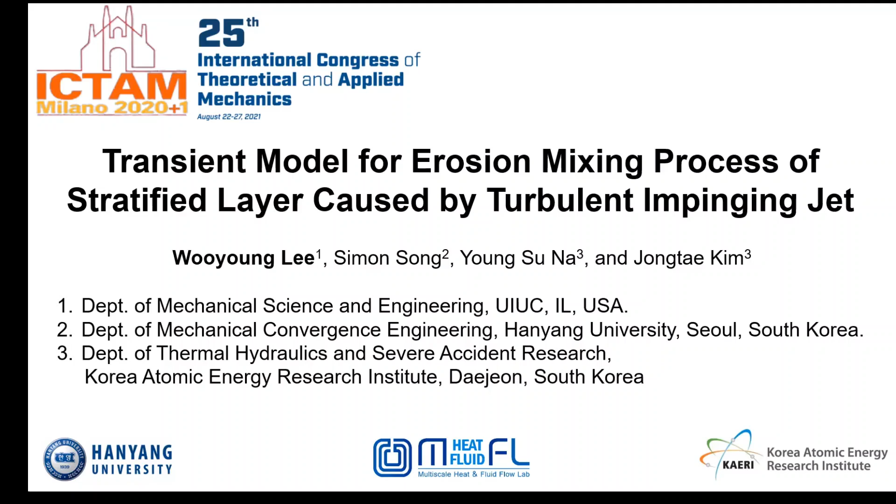The topic of this talk is the transient model for erosion mixing process of a stratified layer caused by a turbulent impinging jet.

The erosion mixing phenomena of the stratified layer caused by a turbulent impinging jet is of interest when evaluating the hydrogen risk of nuclear power plants in severe accidents, because it determines the behaviors of stratified hydrogen layer in a containment building and affects the safety of the building.

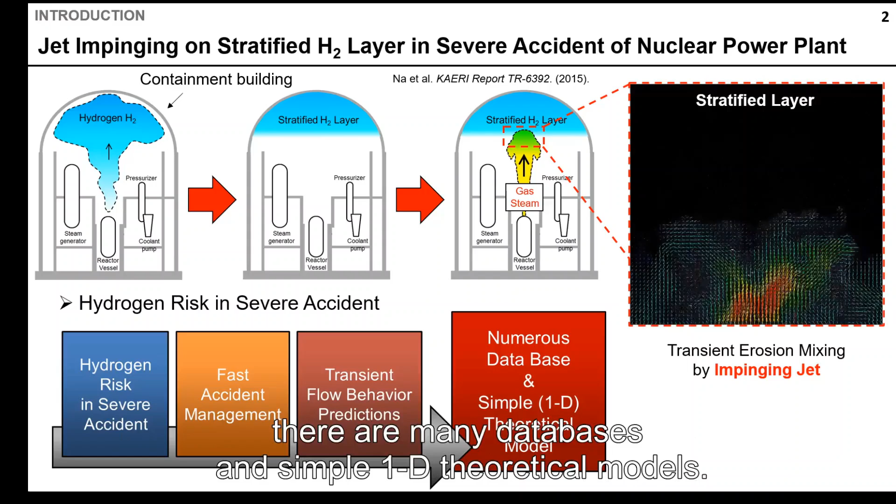To manage the severe accident quickly, it is important to predict the hydrogen behaviors quickly and accurately. This can be achieved only if there are many databases and simple one-D theoretical models.

To obtain databases, experts in Germany, France, Switzerland, Japan, and Korea have constructed large-scale experimental facilities, and they have performed erosion mixing experiments.

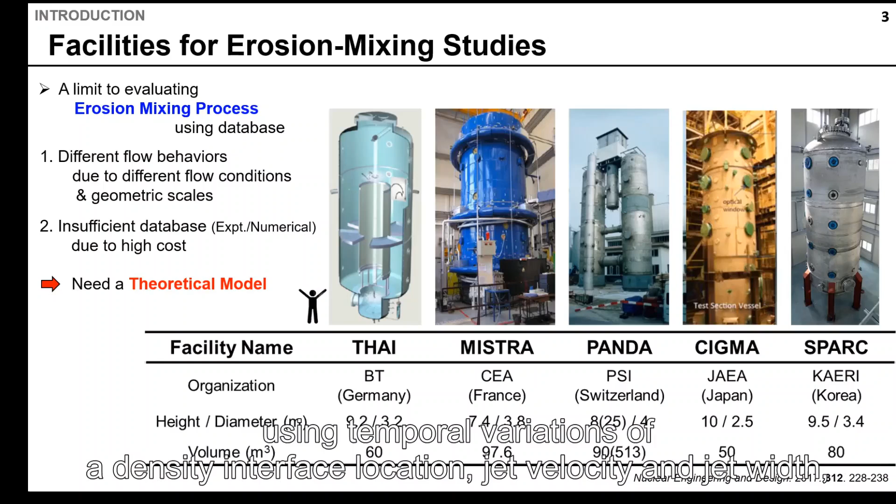With the obtained databases, they have investigated the transient erosion mixing process over a long period of time using temporal variation of density interface location, jet velocity, and jet width, which represent the transient behaviors of the stratified hydrogen layer and impinging jet flow. However, different flow behaviors due to different conditions and insufficient databases due to high cost make it difficult to characterize the process.

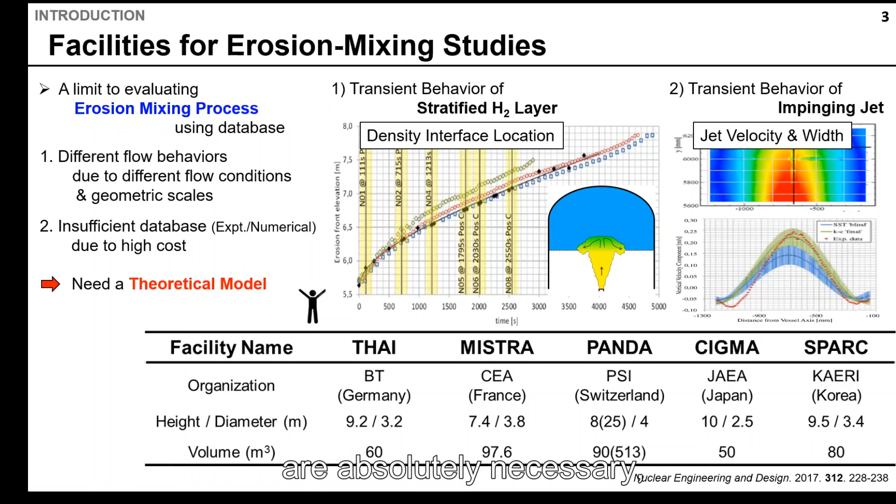To predict and evaluate the process quickly and accurately under various physical conditions in severe accident, transient models with the impact of physical conditions are absolutely necessary, but they have not been developed.

Of course, there is a theoretical model developed for the turbulent jet impinging on a uniformly stratified layer. The previous model shows the time average scheme of the impinging jet flows at a quasi-steady state, like this.

However, the previous model cannot be used to predict the transient erosion mixing process because it's valid only for the quasi-steady state, as you can see.

And it considers only a turbulent jet impinging on a fixed density interface of a uniformly stratified layer, where the density gradient and pressure gradient do not exist.

Unfortunately, real conditions are more complicated than this. The condition could include the elapsed time and presence of density gradients inside the stratified layer and pressure gradient inside the jet due to the impingement.

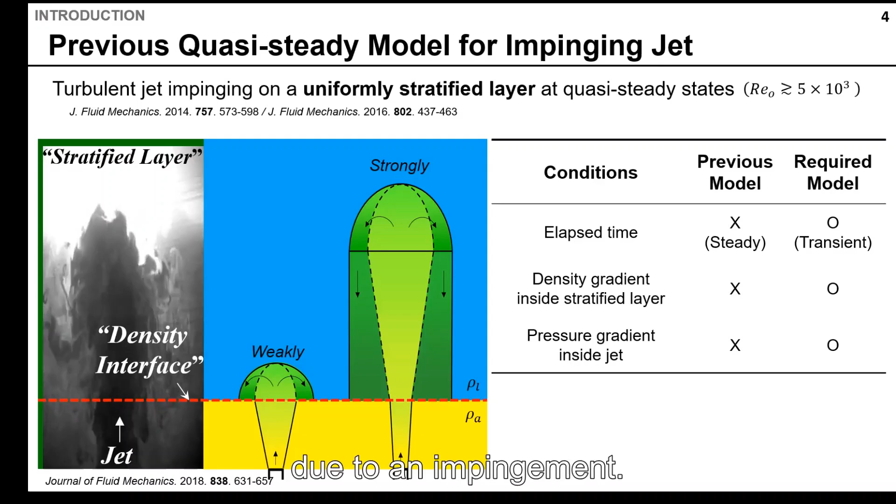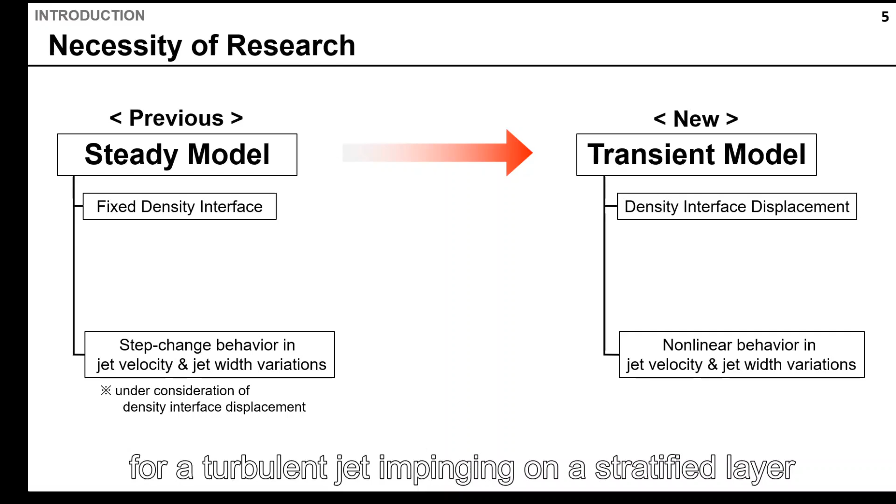To predict and evaluate the transient erosion mixing process over a long period of time, we need to develop the theoretical model of the turbulent jet impinging on a stratified layer by considering the elapsed time, the density gradient of the stratified layer, and the pressure gradient of the jet.

If we consider these conditions, the variation of density interface location, jet velocity, and jet width are expected to show nonlinear behaviors with time, unlike the previous steady model.

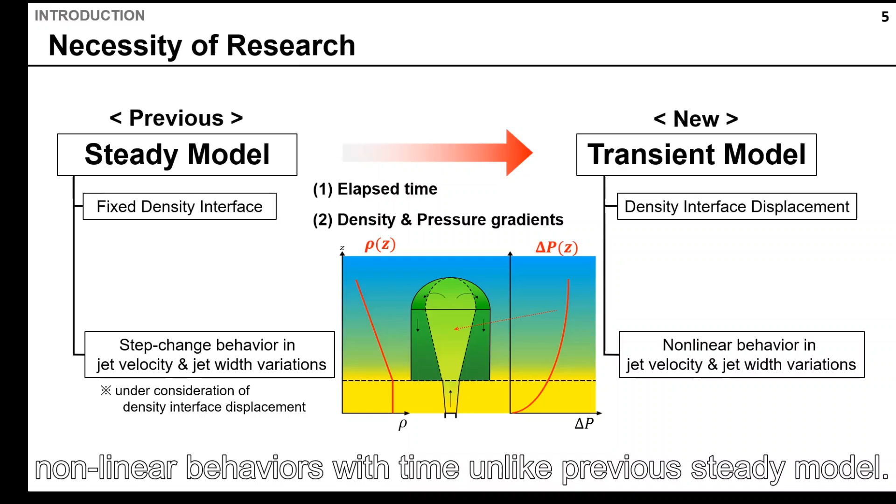So the main objective is to develop the transient model for characterizing the erosion mixing process for a stratified layer and turbulent impinging jet with both density and pressure gradients.

First, we performed erosion mixing experiments. Second, we developed the transient model by considering these conditions. Finally, we validated the model using the experiment data.

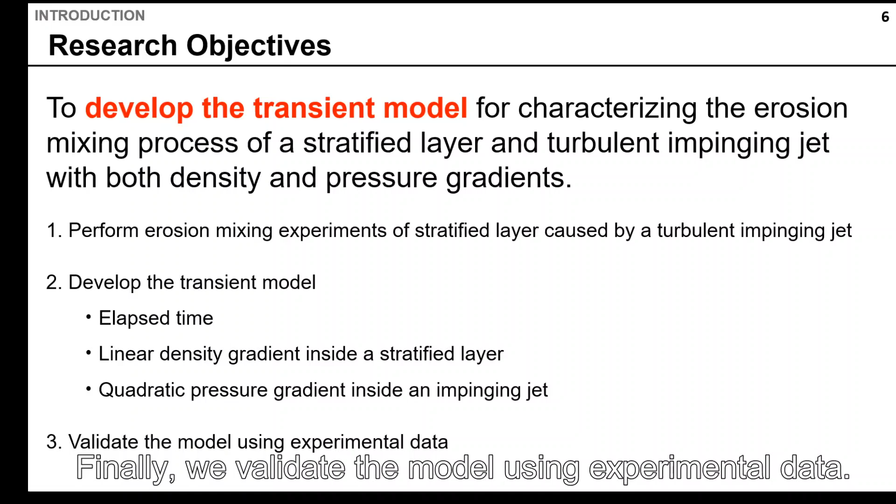From now on, I'm going to explain the experimental setup.

The Korea Atomic Energy Research Institute made a SPARC test facility for the erosion mixing experiment. The SPARC test facility is comprised of a cylindrical pressure vessel, gas sampling pipes, and a jet nozzle.

We first made the stratified layer using helium gas instead of hydrogen gas, and then we injected the turbulent jet using air at a constant flow rate through the jet nozzle.

To measure the velocity field, we used the large-scale PIV system. The width or height of the field of view were about 84 centimeters.

A gas mixture inside the vessel was sampled through the gas sampling pipes, and each density is calculated based on the helium concentration measured by a thermal conductivity sensor.

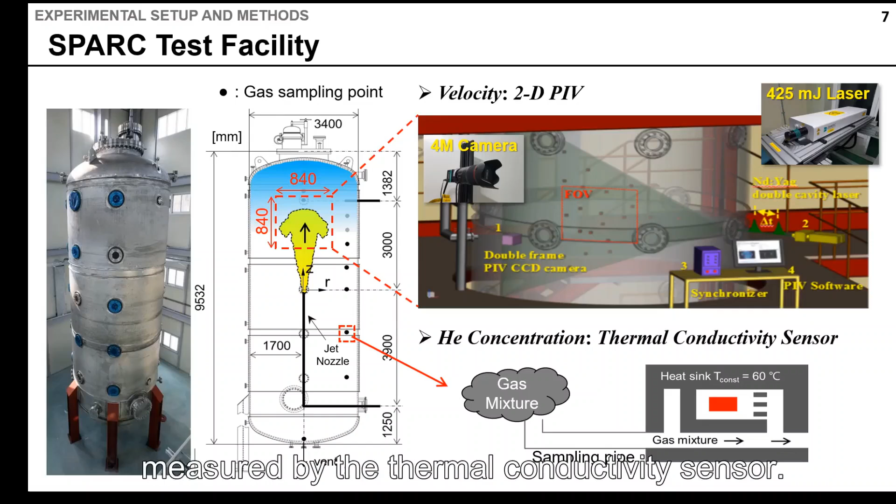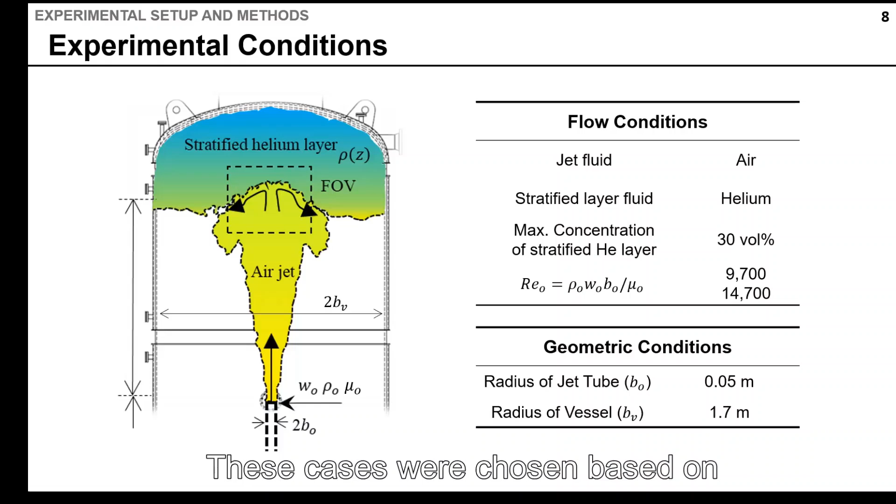We performed the experiments with different flow rates of air jet while keeping the helium concentration of the stratified layer at 30%. In this study, jet source Reynolds numbers of case 1 and case 2 were 10,000 and 15,000 respectively. These cases were chosen based on the scenario of the postulated severe accident.

From now on, I'm going to explain the experimental results.

This slide shows the temporal variation of vertical density distribution and time average axial velocity field inside the vessel for case 1. Each vertical axis is vertical position rescaled by the jet nozzle radius and jet entrainment coefficient. The horizontal axis are local density and the horizontal position rescaled by the jet fluid density and jet nozzle radius respectively. As shown in figure A, the interface location and the density gradient went up together as time increased in the course of the erosion mixing process.

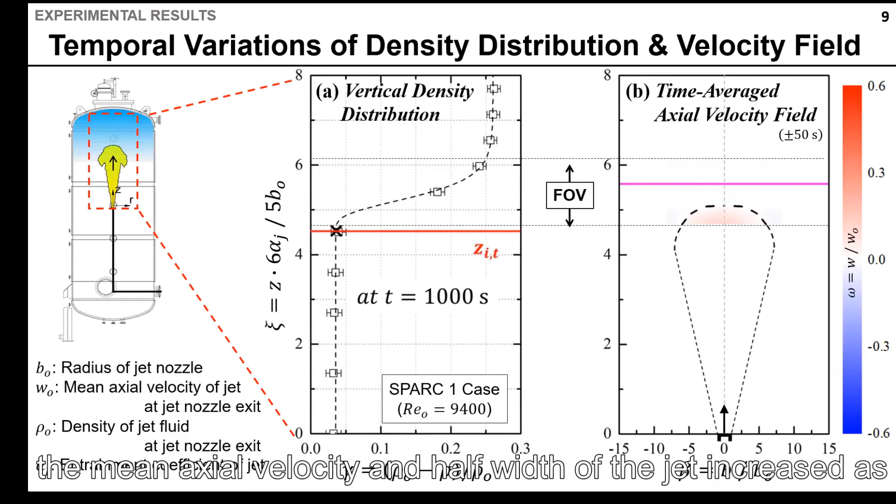From the result, we found that the density gradient has formed linear over a wide vertical range and varied with time. Similar to this, as shown in figure B, the mean axial velocity and half width of the jet increased as time increased at a fixed vertical position.

This slide shows the temporal variation of density interface location, jet mean axial velocity, and jet half width for case 1. Each horizontal axis is elapsed time rescaled by the jet entrainment coefficient, jet nozzle radius, and jet mean axial velocity at jet nozzle exit. The vertical axis rescaled the interface displacement, jet mean axial velocity, and jet half width.

As shown in figure A and B, all the variation showed nonlinear behavior with time, where it went up rapidly in the initial stage but slowed down afterward.

On the other hand, we could not predict these behaviors despite use of the corresponding previous model, which does not consider density and pressure gradients, but only considers elapsed time.

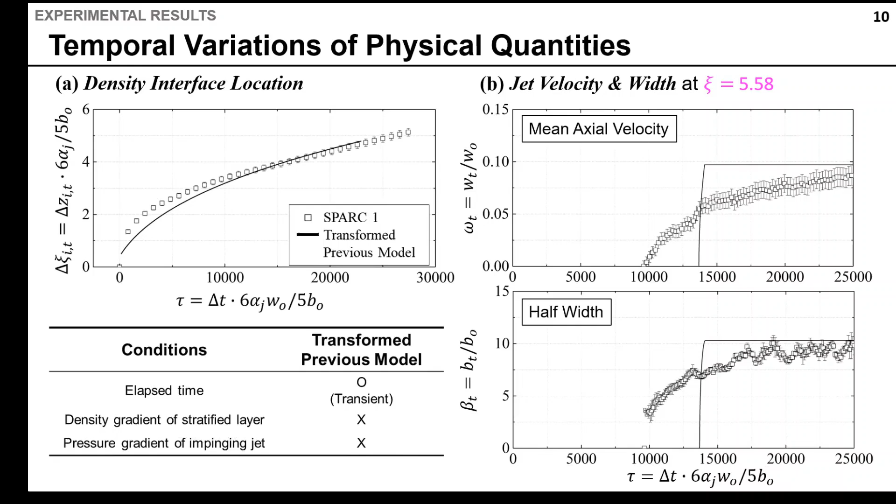From the result, we found that the nonlinear behaviors were induced by the presence of density gradient and pressure gradients, which means that the variation depends mainly on the gradients. Therefore, the gradients should be considered to predict the nonlinear behaviors in the variations.

From now on, I'm going to explain the development of a transient model for a turbulent jet impinging on a linearly stratified layer in the presence of pressure gradient.

As I mentioned before, the variations are affected by density and pressure gradients. To develop the model, it's necessary to include a negative buoyant force, negative pressure force, strength of density gradient, and strength of pressure gradient like this.

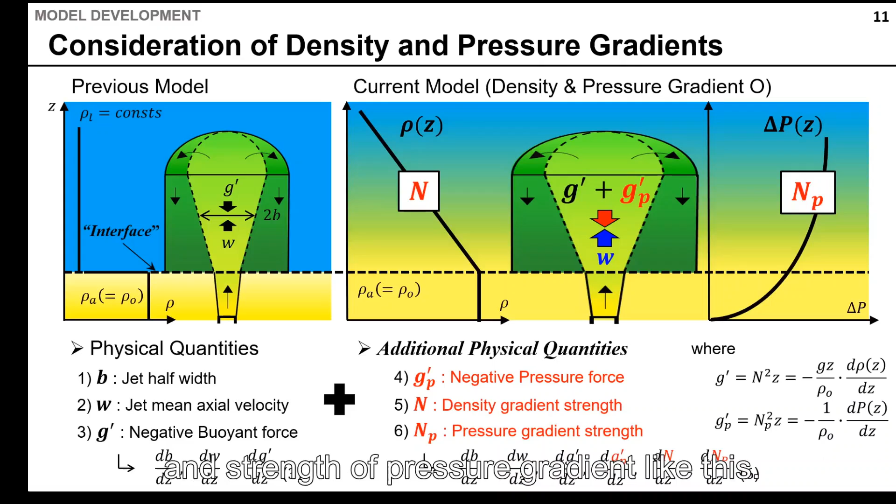These differential equations of quantities are derived from the flux conservations inside control volumes. There are 5 fluxes, from the volume flux to the energy flux. For the 5 distinct regions, the same derivation process has been performed.

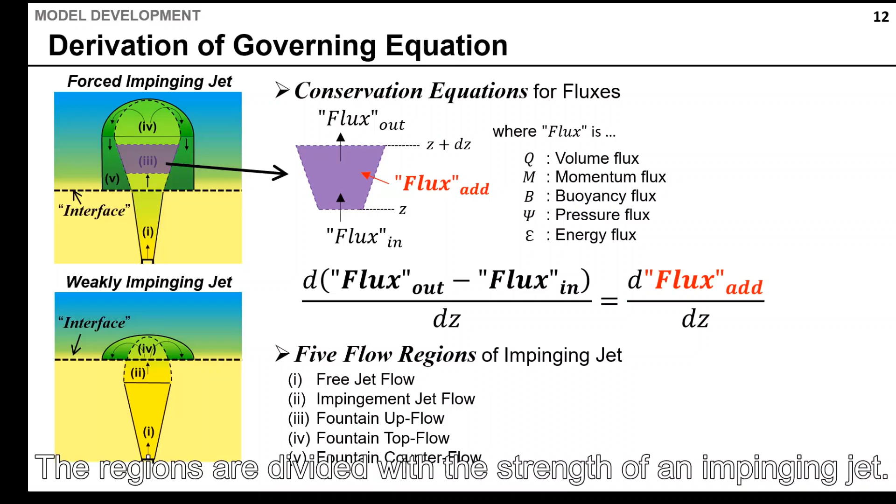The regions are divided with the strength of the impinging jet. As a result, the governing equations for each region are derived. For example, this is the equation of region 3.

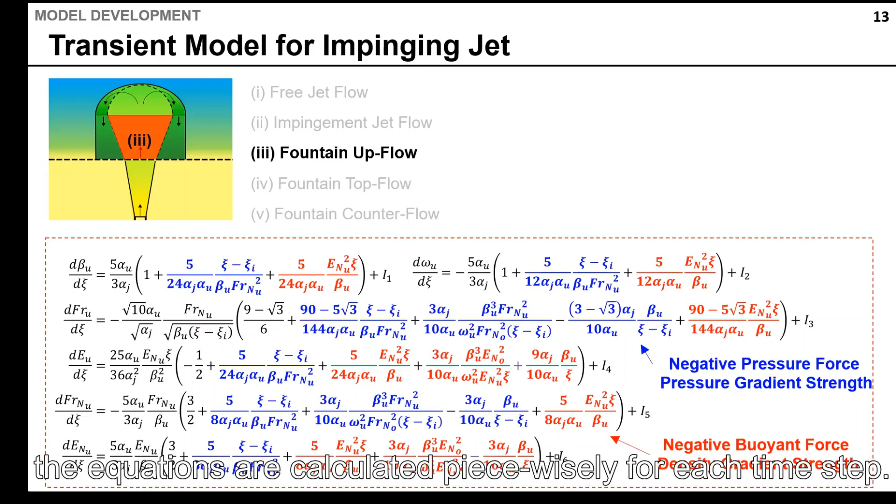The equations are expressed in dimensionless form and include new terms which represent the impact of the density gradient and pressure gradient. The equations are then calculated piecewise for each time step.

From the result, we found that the current model predicts the nonlinear behaviors, unlike the previous model, even though the current model had a little difference from the experimental data at the initial stage and at other points. This good agreement results from the consideration of density and pressure gradients.

The values of the RMS error also proved that the difference between the prediction of the current model and the experimental data was smaller than the previous model.

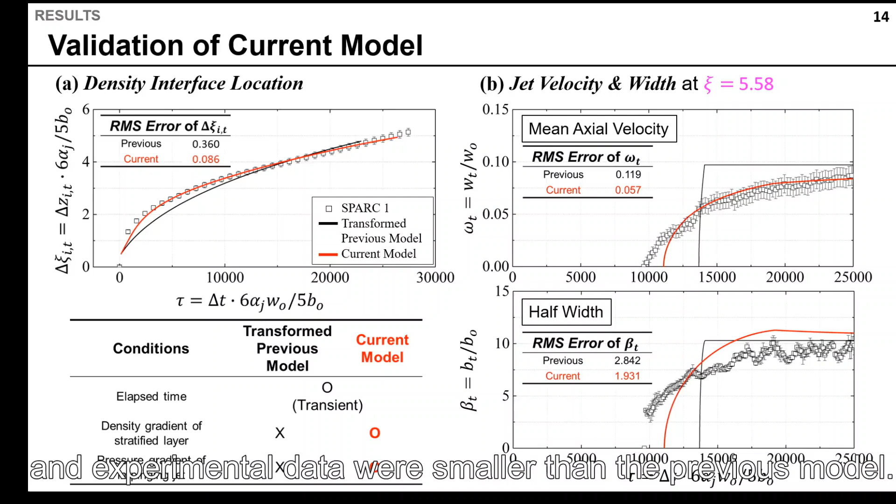We developed the transient model to predict the non-linear behaviors by considering the gradients. As a result, we found that the prediction of the current model was in good agreement with experimental data.